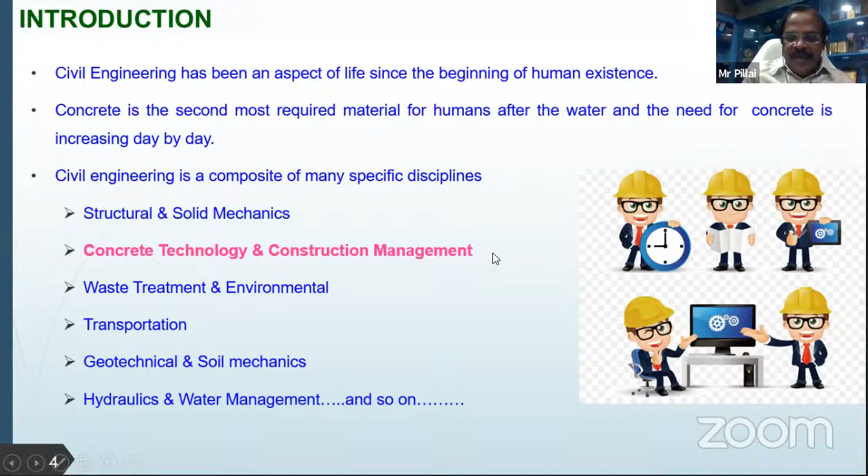Lot of changes are taking place almost in all fields of engineering. Especially the rate of change is very fast when we consider branches like computer science and engineering, information technology, etc. So the developments which have taken place last year may become obsolete this year. Engineers in that field regularly have to update their knowledge with respect to recent developments. Civil engineering is no exception. Change is the only thing that never changes, people say. So in civil engineering also, lot of changes are taking place, with respect to materials, with respect to construction technique, and with respect to other aspects also, like construction management and so on.

If you recollect, in 1960s we started with ordinary Portland cement, mostly people used to call it OPC. Then in 90s, we started calling the cement with respect to their grades: 33 grade, 43 grade, and 53 grade OPC. In 95, blended cement with special cement, we started getting that one. And many admixtures are there, both chemical admixtures and pozzolanic admixtures, to impart one or more desirable quality. Depending upon the requirement, we can add the admixtures.

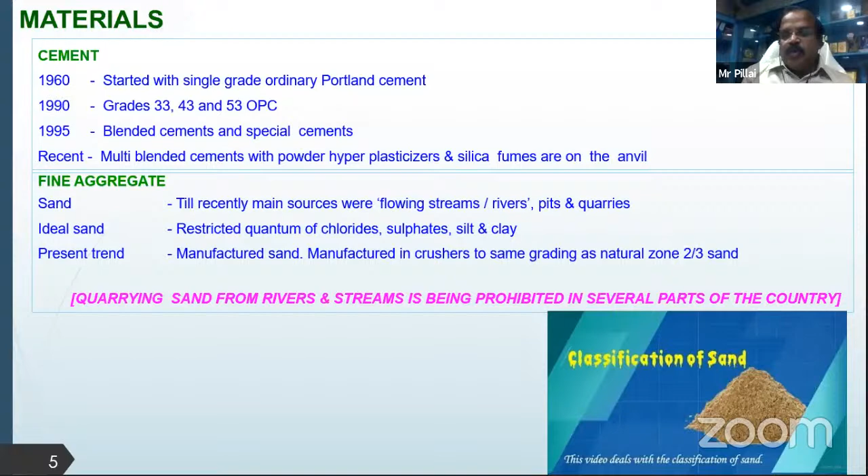With respect to fine aggregate, sand is the most common one we use, and flowing streams and rivers, pits, or quarries are the main sources for sand. Many state governments have banned the use of river sand for construction purposes. So now we are going for M sand, manufactured sand or artificial sand. The ideal sand will have restricted quantum of chloride, sulfate, silt, clay, etc. We cannot use the sea sand available near the seashore because of the contents of chemicals, etc. So the present trend is manufactured sand, manufactured in crushers to the same grading as natural zone 2 or 3, depending upon the requirement.

When we consider coarse aggregates, normally till recently people believed that the preferred maximum size of aggregate for concrete works is 20 mm. There is a general belief that strength is higher with the concept of higher size aggregates. In reality, it is not true. The change in trend is demand for liquid concrete, demand for high performance concrete, trend towards smaller aggregates to achieve the above. Basic studies and fracture mechanics studies have indicated that smaller size aggregates are preferable. So uniform grading of aggregates should be there in order to get the best concrete.

Then, of course, the recycling of aggregates - earlier the concept was that you have to obtain aggregates from natural sources, but now environmentally friendly procedures include recycling of debris, oil, and sewage waste, for conservation of natural resources. We can conserve natural sources by opting for the recycling of aggregates.

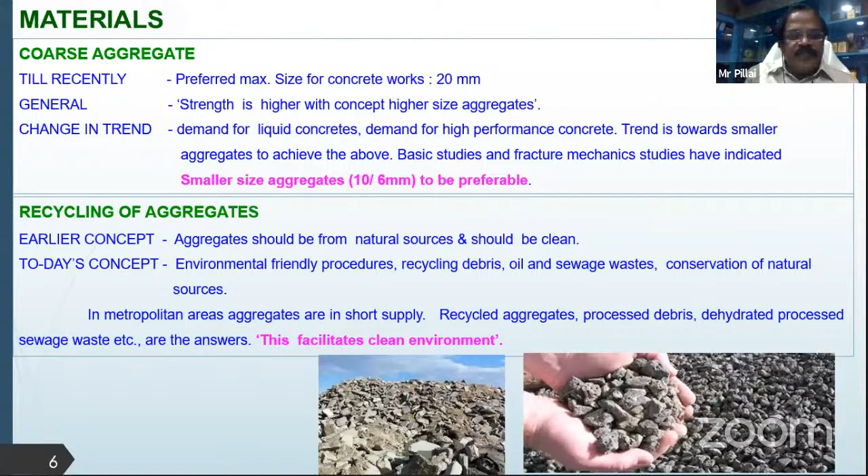Coming to water, till 1975 the best source for water was a natural source, either river or other water sources. But what is the ideal mixing water? Normally people say that potable water should be used for mixing of concrete and curing, etc. But in reality, nowadays, most potable waters are proved to be unfit for mixing. The condition is that the water we have chosen should satisfy the relevant standard codal provisions. So today's best mixing water is processed water satisfying the relevant BIS standards.

Coming to reinforced bars, again in 1967 we used to use MS plain bars of grade FE 250. With further development, twisted deformed bars of grade FE 415 came into existence, and with recent developments, in addition to the above, FE 500 grade steel also we started using. Corrosion is the main problem in reinforced concrete. In order to contain corrosion, we started using stainless steel bars also, of course with limited application. Then the recent development is FRP reinforcing bars, and development of cladded reinforcing bars - fiber reinforced polymer reinforcement bars, which we'll discuss in more detail later on.

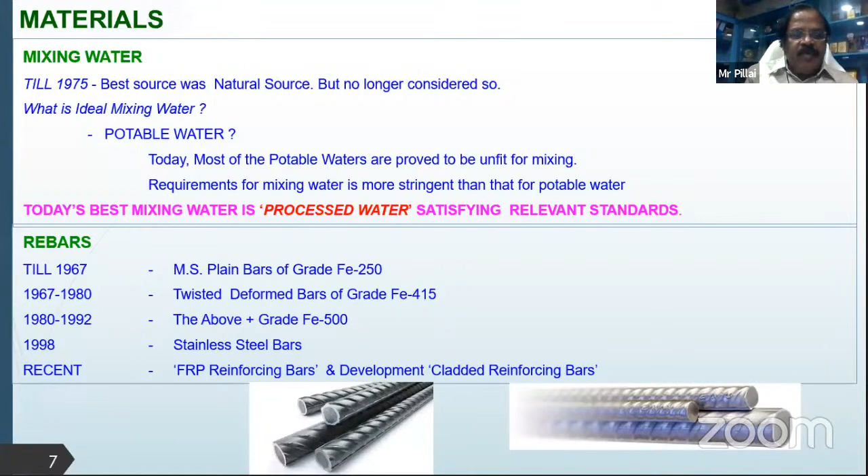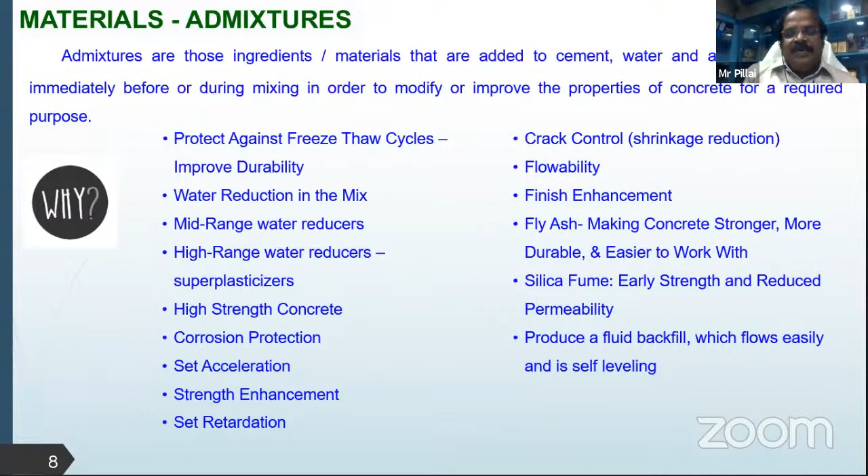Then a lot of admixtures are there to impart one or more of the desirable qualities, and the purpose all of you know very well. Let me not repeat those things.

With respect to admixtures, earlier, till 1980, only air entraining agents from natural vegetation used to be used in concreting. Then we started using different types of admixtures, especially plasticizers and super plasticizers, which are widely used, and recent developments include carboxylate ether-based hyperplasticizers, and many more are available.

Coming to the ingredients, earlier normally concrete means cement, fine aggregate, coarse aggregate, and water. In the 1960s, we used to have only 4 ingredients. In 1980, with the addition of plasticizer, the number of constituent materials became 5. Later, with inclusion of silica fume, it became 6. Again, with fly ash or GGBS, it became 7, and so on. Then we started using blended cement and multi-blended cement, and finally nowadays multi-blended cement with rock fractions, processed water, and we can add latex solution to impart ductility.

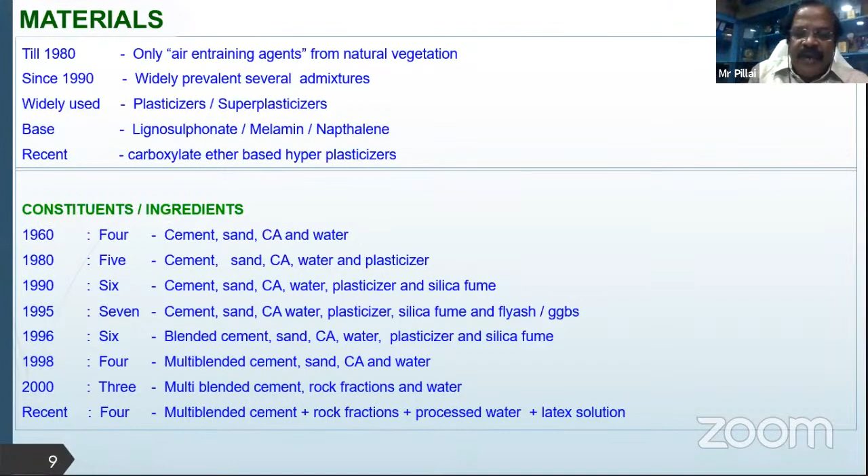So in recent days, the number of ingredients can be either 3 or 4, depending upon whether we are using latex solution or not, since latex solution will improve ductility properties. Cement, or concrete, is a brittle material. So in places, especially in earthquake-prone zones, ductility is a very important property. In order to introduce ductility, you can use latex solution, and a lot of research work is going on in the use of latex solution to improve the ductility of concrete.

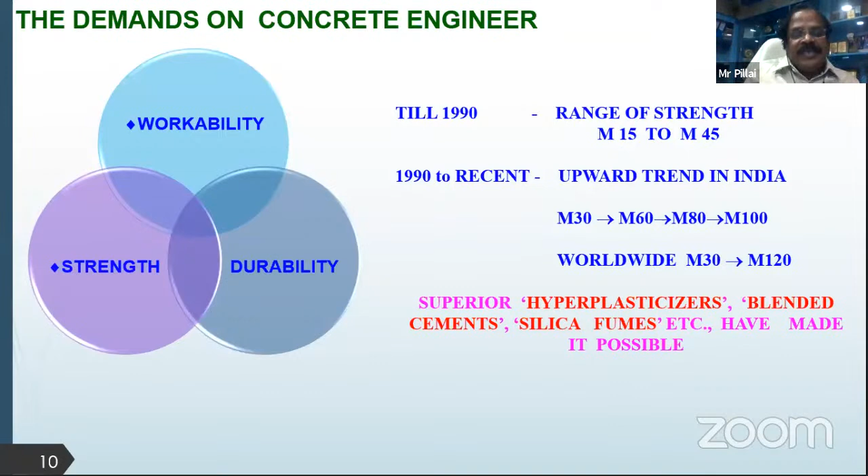Regarding the grade of concrete, earlier we used M15 to M45. Now we are using higher strength concrete, so M30, M60, M80, or even up to M100. Throughout the world, people are using up to M120 also. Still, a lot of research work is going on in order to produce higher grades of concrete up to M200, and with the availability of all types of plasticizers and admixtures, the time is not quite far off that we will definitely be able to achieve higher strength or higher grade concrete.

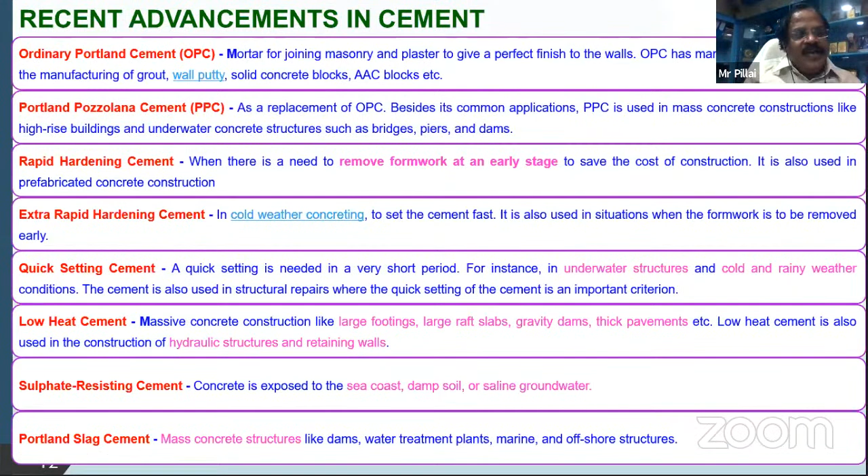So, recent advancements in cement - I'm not going to spend much time on this, since all of you are familiar with these things: OPC, PPC, rapid hardening cement, extra rapid hardening cement, quick setting cement, low heat cement, sulfate resisting cement, Portland slag cement, high alumina cement, and different types of cements. Depending upon the necessity, we can make use of all these things.

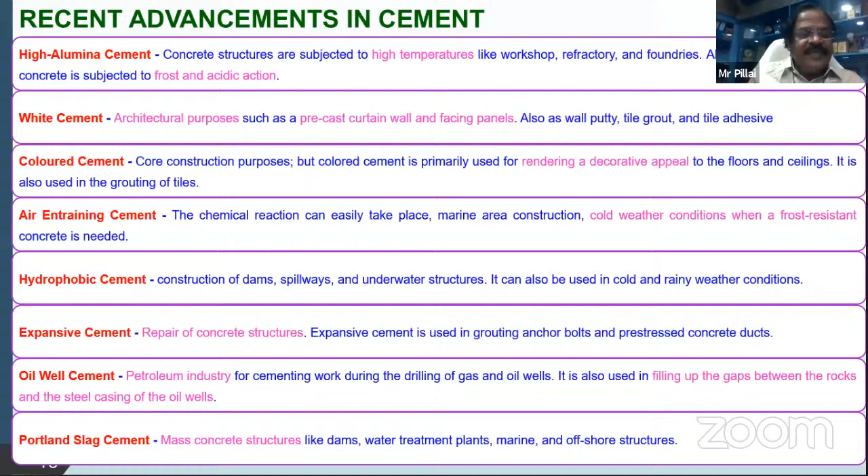In fact, our normal procedure nowadays for preparing concrete is: proportioning or mix design, after that proportioning the materials, mixing, transportation, placing, compaction, and curing. These are the various steps involved in the manufacture of concrete.

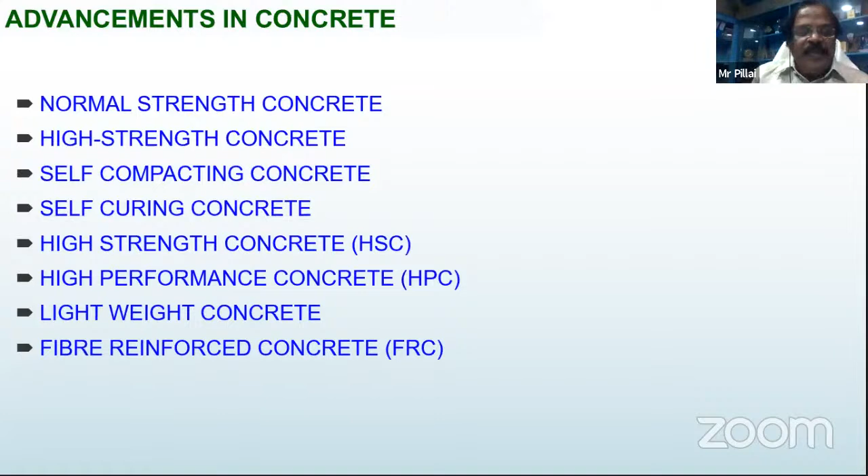Maybe after 1 or 2 generations, the future generation will be studying a different procedure for preparation of concrete, especially with the availability of many admixtures. We will be opting for self-compacting concrete, in which case the need for vibration or compaction will be absent. Similarly, many chemicals are available, so we can get rid of the regular procedure for curing of concrete. Self-curing compounds are available, using which no external curing is needed. So these 2 steps, compaction and curing, will be absent in the methods of preparation of concrete when the future generation studies the method. Then of course comes fiber reinforced concrete, which is familiar to all of you.

Normally, cement or concrete is very strong in compression but weak in tension. In order to introduce tensile load carrying capacity, we introduce reinforcement. But in the case of shell structures, providing reinforcement may be difficult. In such cases, we opt for fibers.

So, fiber reinforced concrete we have, and the updated version of fiber reinforced concrete is slurry infiltrated fiber concrete, known in short as SIFCON. Here there is random placement of steel fibers in the mold to form a fiber bed. Then cement slurry or rich flowing cement mortar is poured onto the fiber bed and vibrated to ensure that it reaches every nook and corner of the mold. Curing is almost identical to other concretes. The only difference is that the fiber volume in fiber reinforced concrete is normally 1 to 2%, whereas in SIFCON it is 6 to 15%, and sometimes it may go up to 20% also.

Another modified form of SIFCON is SIMCON, slurry infiltrated mat concrete. In SIFCON, we place the fibers in a random manner, whereas in SIMCON, we provide the mat or fibers in the form of a mat in a layered fashion.

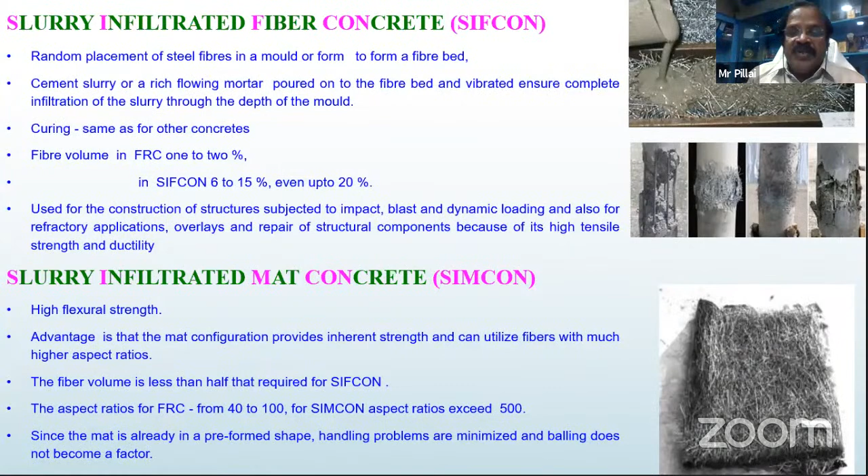Then there is compact reinforced composite, CRC, a very strong and brittle cementitious matrix, toughened with a high concentration of fine steel fibers. When we use more fibers, the resulting material is called compact, and here it will be pressed, not conventionally vibrated. The mechanical behavior will be more or less like that of structural steel, but steel construction costs much more. So when we opt for CRC, the cost can be reduced while the strength remains almost equivalent to that of a steel structure.

Concrete is normally a brittle material, but we can make it bendable. A lot of research work is going on in various countries to make concrete ductile or bendable by using appropriate admixtures.

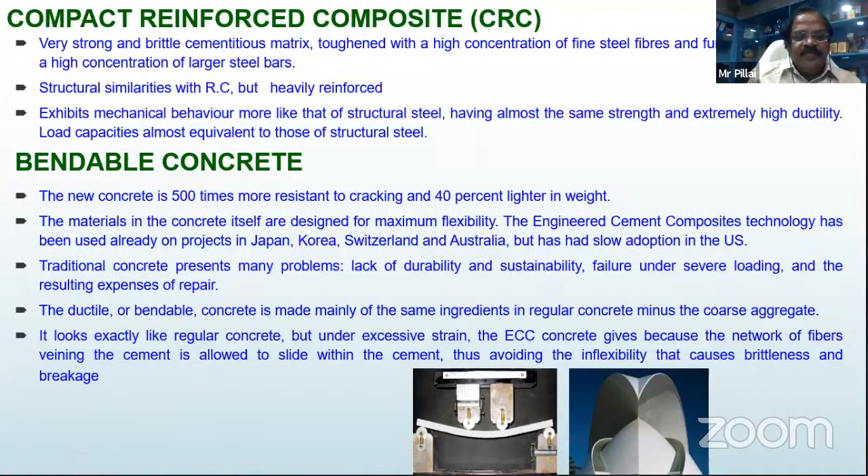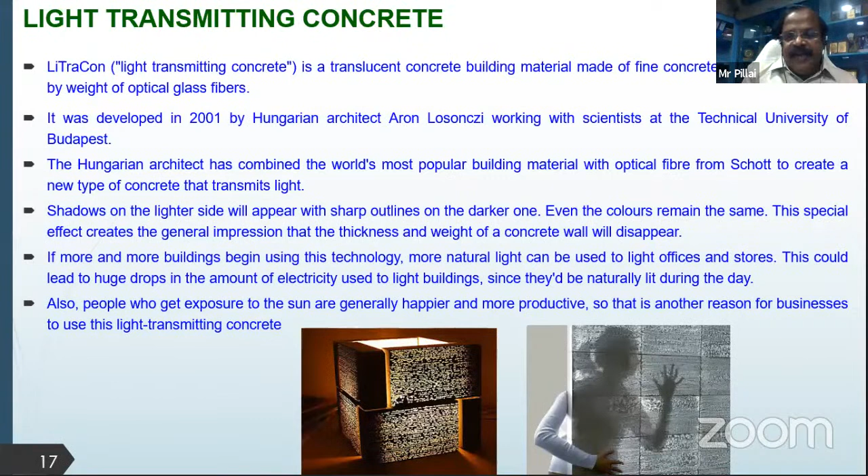Normally, in concrete structures, light cannot be transmitted. But research by Hungarian architect Aron has proved that we can introduce this light transmitting property also for concrete, especially in places where privacy is not important but lighting is important. We can opt for light transmitting concrete.

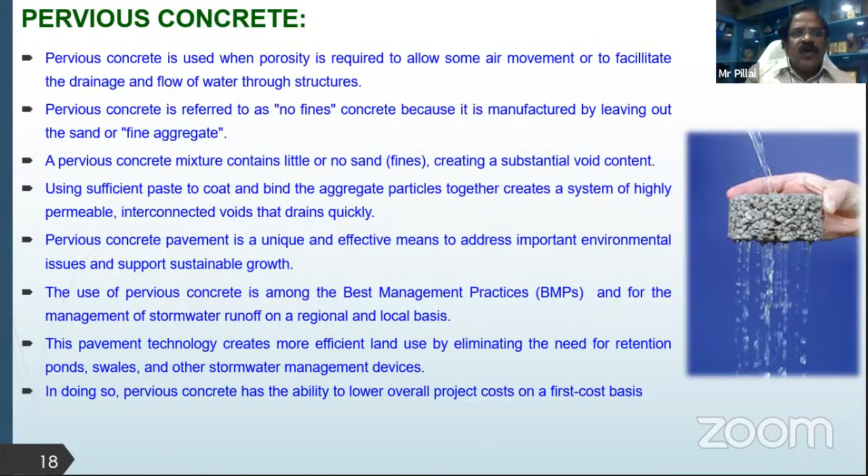Pervious concrete: normally, to avoid or prevent corrosion, we have to make concrete as dense as possible, minimizing its porosity. But in certain places, especially pavements, concrete should be porous so that rainwater collected can seep through to maintain the groundwater table at a higher level. In such cases, pervious concrete is very useful.

A lot of research is going on regarding the suitability of materials available on the moon for use as construction material. Tomorrow, people may start traveling regularly to the moon, and if we want to stay there for a short period, we have to make use of the materials available there for construction purposes. When we make use of such materials, or a modeled version, for construction, the resulting concrete is known as lunar concrete.

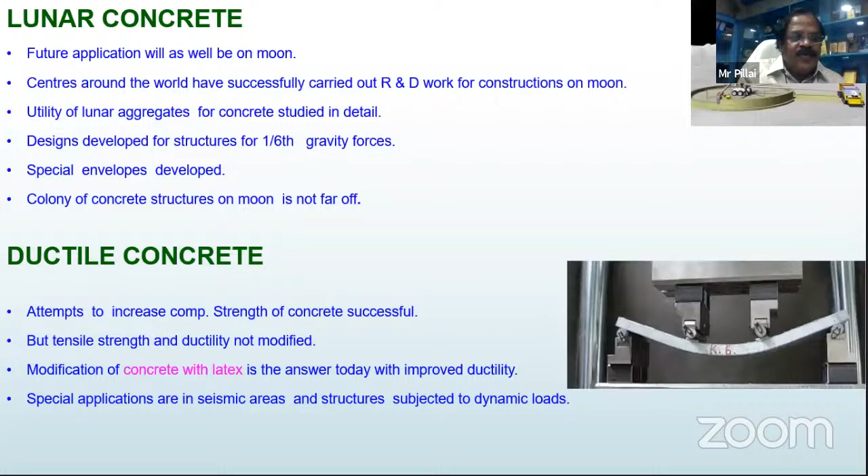Ductile concrete is more or less like bendable concrete, as we already discussed. When we introduce the ductility property, it becomes ductile concrete.

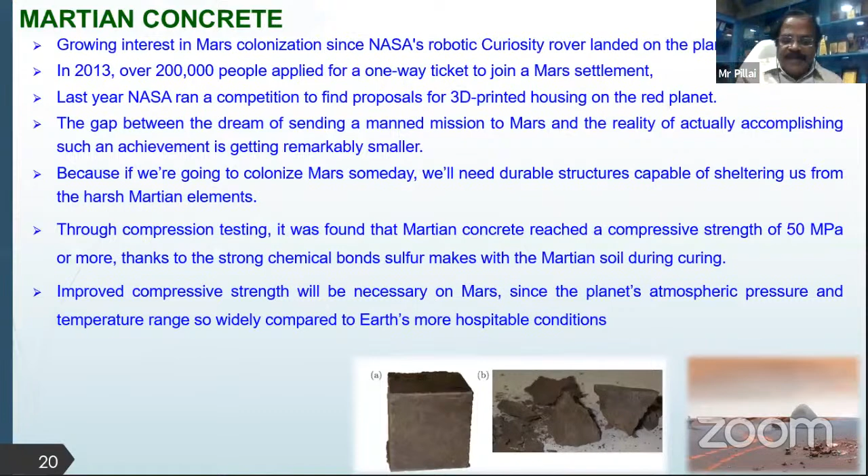Similar to lunar concrete, there is Martian concrete. There is growing interest in Mars colonization since NASA's robotic Curiosity rover landed on the planet. Many people may be interested in traveling to Mars in future, so the suitability of materials available on Mars for construction purposes gives us what is known as Martian concrete.

Smart concrete is often termed conductive concrete. When carbon fibers are introduced while preparing the concrete, the electrical resistance changes, and we can monitor the stress level, strain level, etc. This type of concrete is known as smart concrete.

It has applications in different areas, especially highways, where by sitting in front of our system, we'll be able to measure the weight of the vehicle, speed of the vehicle, and so on.

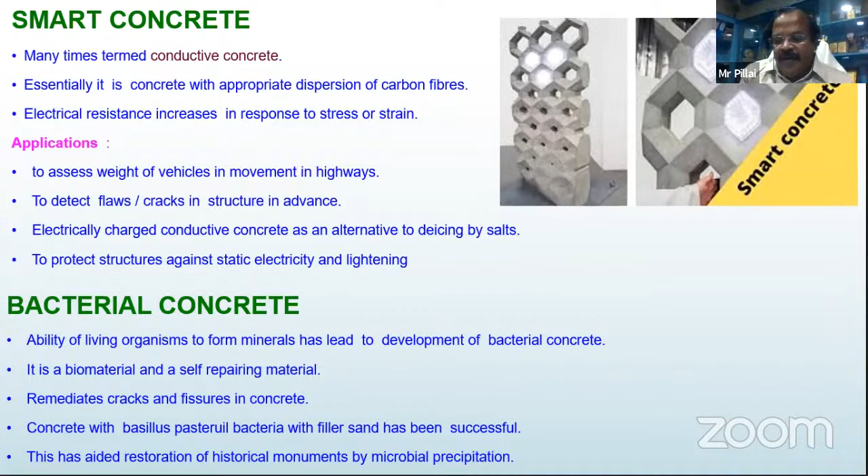Another popular concrete is bacterial concrete. The ability of living organisms to form minerals has led to the development of bacterial concrete. Bacteria will be introduced, especially for repair and rehabilitation work, using this type of concrete.

FRP bars: as mentioned earlier, corrosion is a major problem in concrete. Other methods like using CRS, corrosion resistant steel, and different types of coatings on the concrete surface can minimize the corrosion problem.

Another option is fiber reinforced polymer or plastic reinforcing bars, available in different colors, with weight almost 25% lesser than steel, easier fabrication and installation, electrically and thermally non-conductive, and invulnerable to chemical corrosion. Initially, the cost of FRP bars may be slightly more than conventional tor steel or MS bars.

But when used on a large scale, and considering the life cycle cost—initial cost plus maintenance cost—this may definitely be cheaper than using the other option.

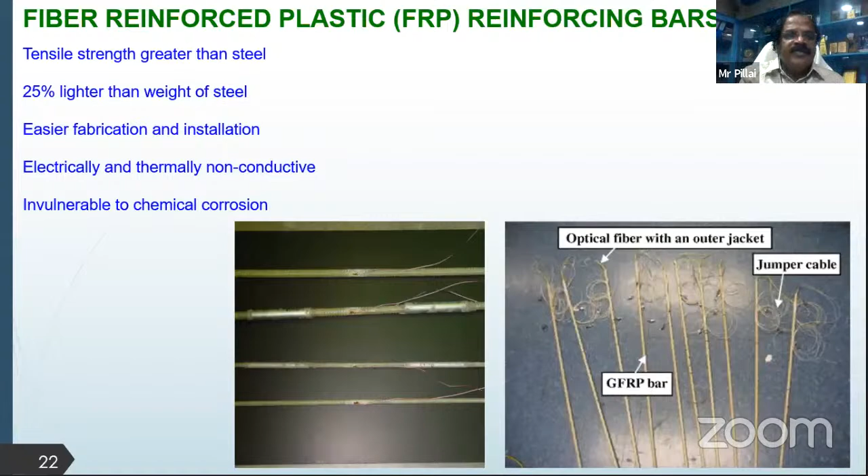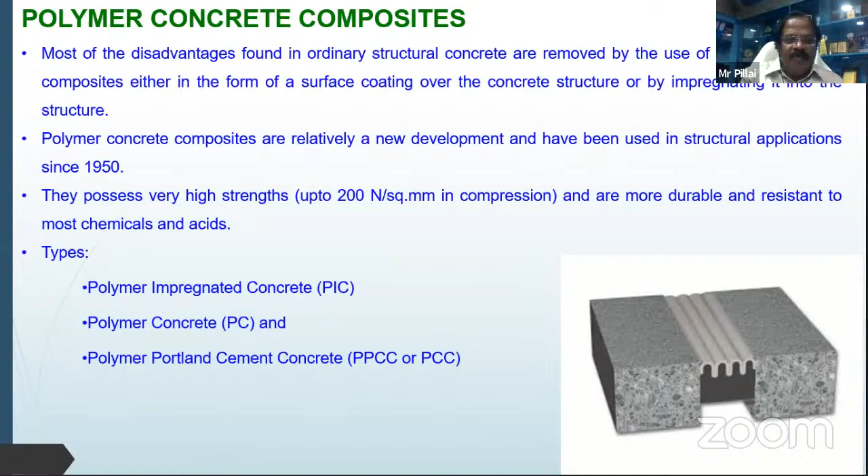Then there are polymer concrete composites. Different types of polymers exist: polymer impregnated concrete, polymer concrete, and polymer Portland cement concrete, and so on.

Waterproof concrete. The use of air entrained concrete reduces the permeability, so you can get a waterproof concrete using water reducing agents and so on.

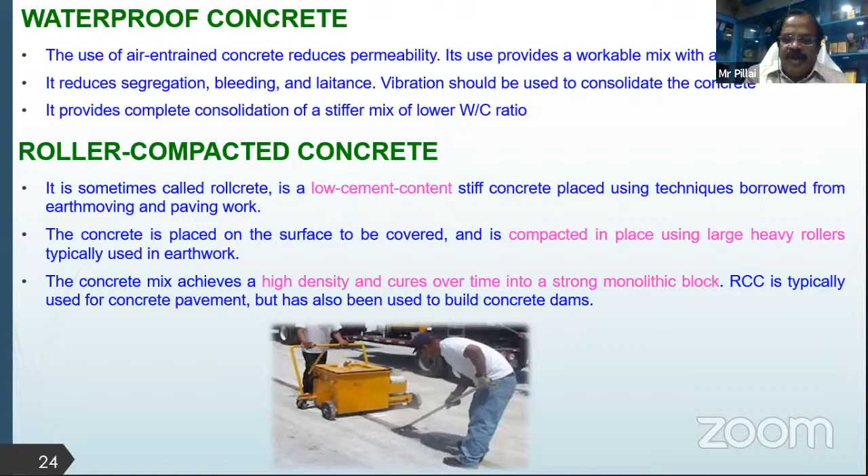Roller compacted concrete, sometimes called rollcrete, is a low cement content stiff concrete placed using techniques borrowed from earth moving or paving work. It is not compacted like our conventional method, but compacted using heavy rollers. The resulting concrete mix achieves high density and cures over time into a strong monolithic block. Especially for concrete pavement where durability should be more, we can make use of roller compacted concrete.

When we make use of recycled glass as aggregate, the resulting concrete is known as glass concrete, especially from an aesthetic point of view, that type of concrete can be used.

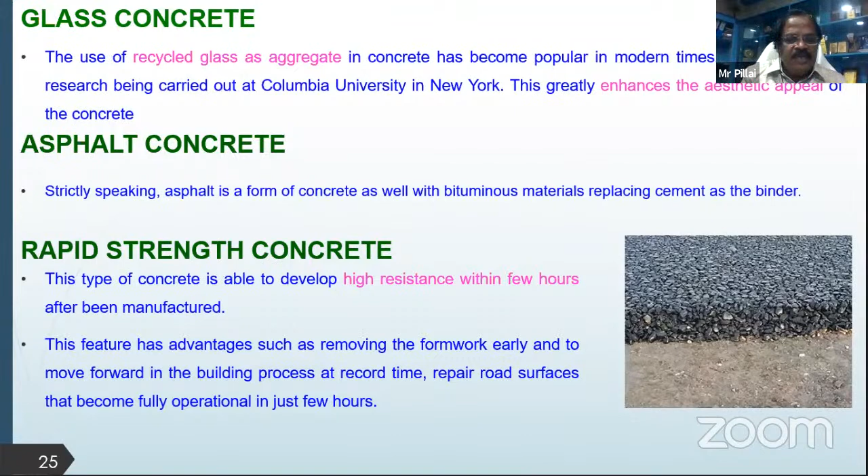Asphalt concrete, here the cement will be replaced by a form of bituminous materials as the binder. Rapid strength concrete is where the strength achievement can be obtained within the shortest period, and we know very well the advantages of rapid strength concrete.

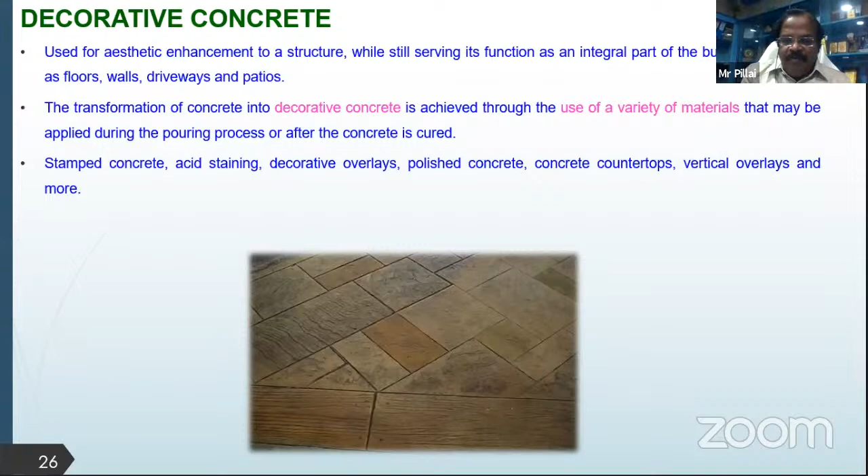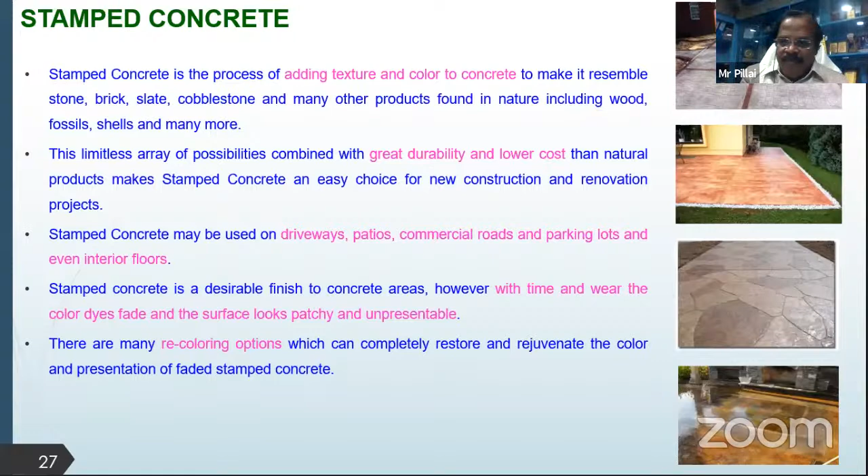Decorative concrete. Normally, conventional concrete has standard color, appearance, etc. In order to improve the appearance, we can opt for what are known as decorative concretes, used mainly to enhance the aesthetic appearance, and a variety of materials can be made use of. One form of decorative concrete is stamped concrete. Even though the pictures look like tiles, the floors or pavements are actually prepared out of stamped concrete.

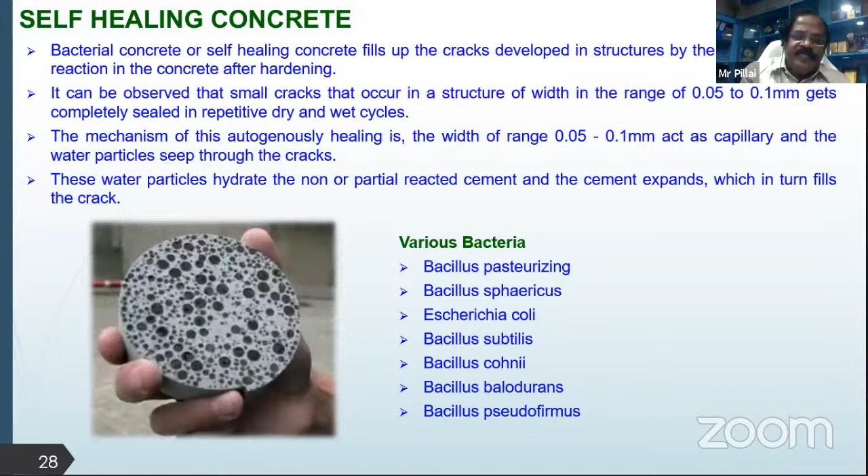Self-healing concrete is another name for bacterial concrete. We already discussed various different types of bacteria. Mainly for carrying out repair work, we can make use of bacterial concrete. Throughout the world, a lot of research work is going on, and people are making use of bacterial concrete for repair and rehabilitation works.

Apart from the developments in concrete, let us discuss the developments or innovations which have taken place with respect to other materials also, like timber, etc.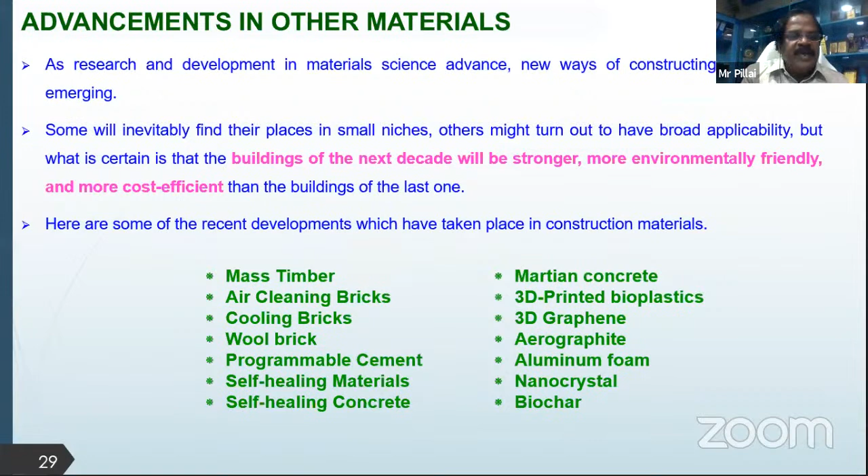Mass timber. Normally when we think of multi-story buildings, concrete comes to mind, but timber can also be used for construction of multi-story or tall buildings. The self weight will be less, and it has its own advantages and disadvantages. In mass timber, solid wood is panelized and laminated for increased strength and other useful properties, which can help tall wood buildings appear in cities again. Wood is originally a high performance material, 100% natural and renewable, and unlike concrete structures, you can always dismantle or reuse the wood removed from a building if necessary.

Again, while preparing concrete, that affects the environment and conservation of energy, especially when we opt for green technologies or green buildings. Naturally, instead of concrete, we can opt for timber, provided timber is available in plenty.

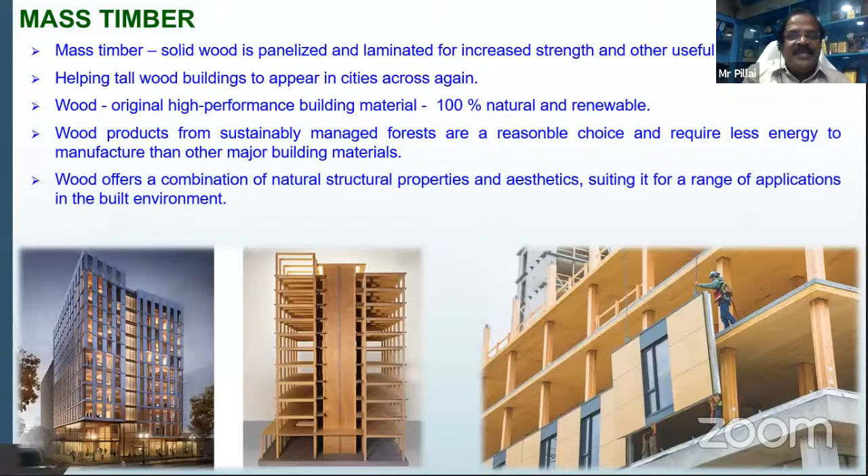Air cleaning bricks, also known as breathing bricks. The air outside the structure is directed into rectangular inlet ports with the help of the faceted surface of the brick. The air that comes into the system is spun by a cyclone filter, winnowing out particles. You can see the arrangement here: a double wall with window operable vents. Air passes through this, and when the air reaches the inside portion of the building, automatically you get a cooling effect. Mainly, this type of brick is optimal for 1 or 2-story buildings or structures where air quality is very poor, especially where pollution is more. This type of brick can be used for construction purposes and has its own advantages.

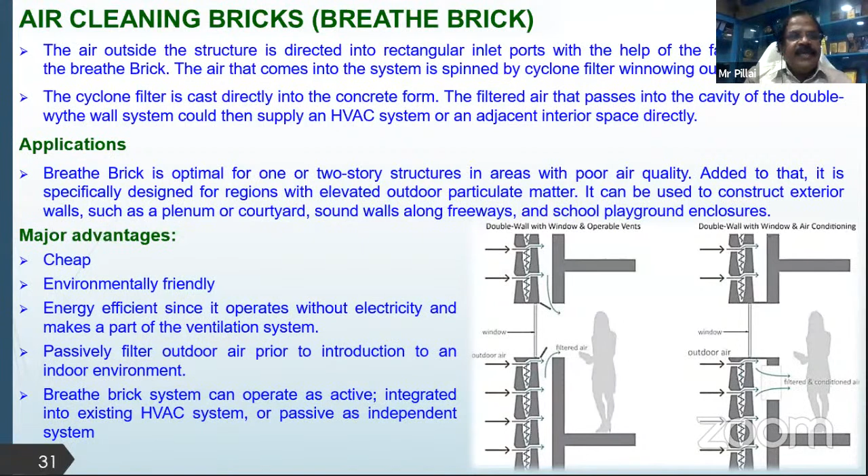Again, cooling bricks, or passive cooling ceramics. Here the bricks have a lot of pores, more or less like air conditioning. In the construction stage itself, we can make use of this type of brick so that we will have a cooling effect inside the house without the consumption of electricity.

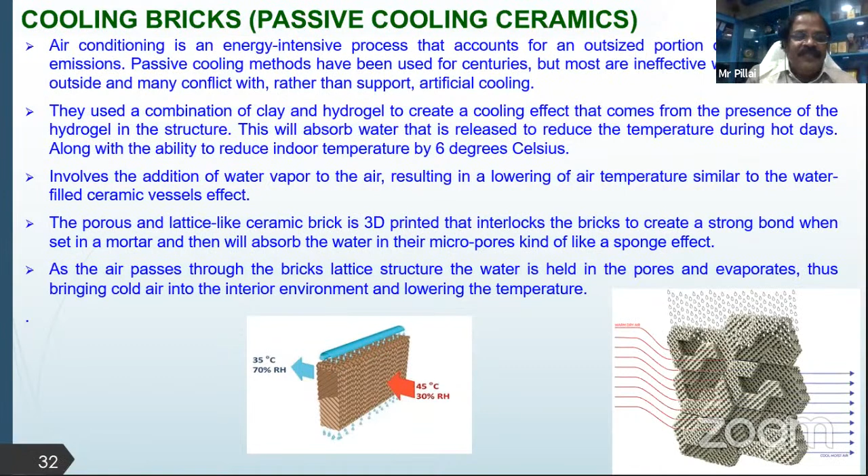That's a major advantage. Wool bricks - researchers in Spain and Scotland have been experimenting with modern forms of unfired clay bricks dubbed with wool. Here again, it's a zero carbon product that can be sourced using local materials.

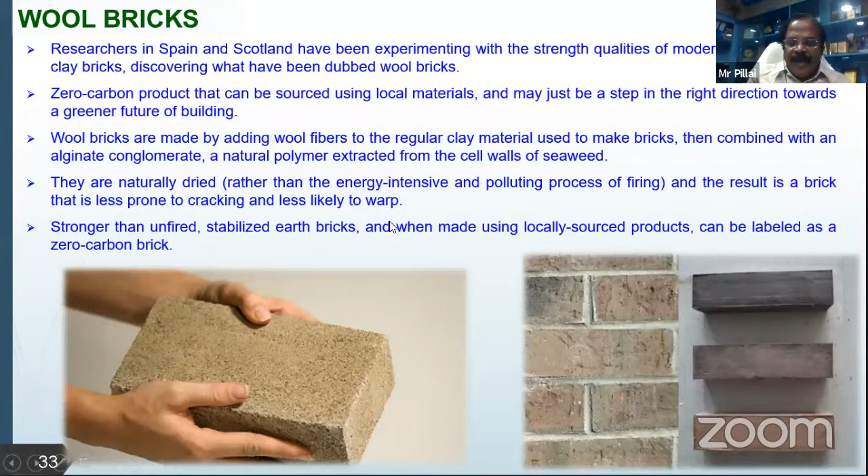This is very strong as compared to the unfired stabilized earth blocks or bricks, and it can be labeled as a zero carbon brick, an environmentally friendly brick.

Programmable cement: scientists at Rice University, Texas, have decoded the kinetic properties of cement and developed a way to program the microscopic semi-crystalline particles within it. This process turns the particles from disordered clumps into regimented cubes, spheres, and other forms, making the concrete less porous and more durable. This technique may lead to stronger structures that require less concrete.

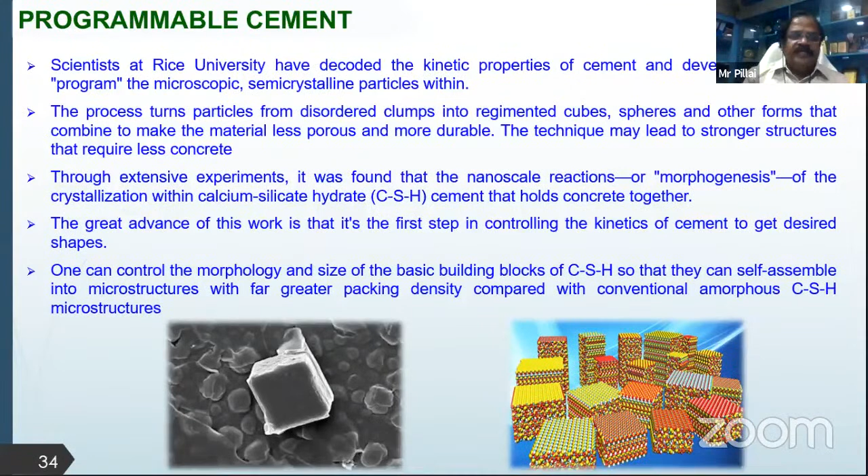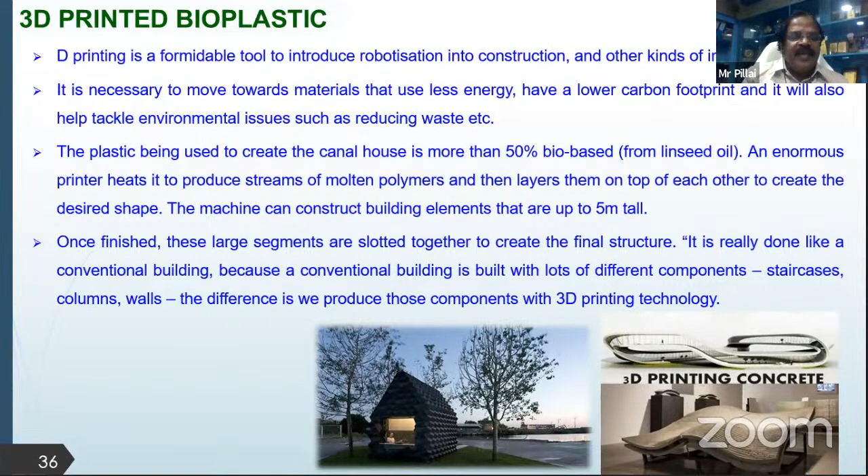Self-healing material we already discussed. 3D printing bioplastic: 3D printing is a formidable tool to introduce robotization into construction and other kinds of innovations, so components can be prepared using this 3D printing technology.

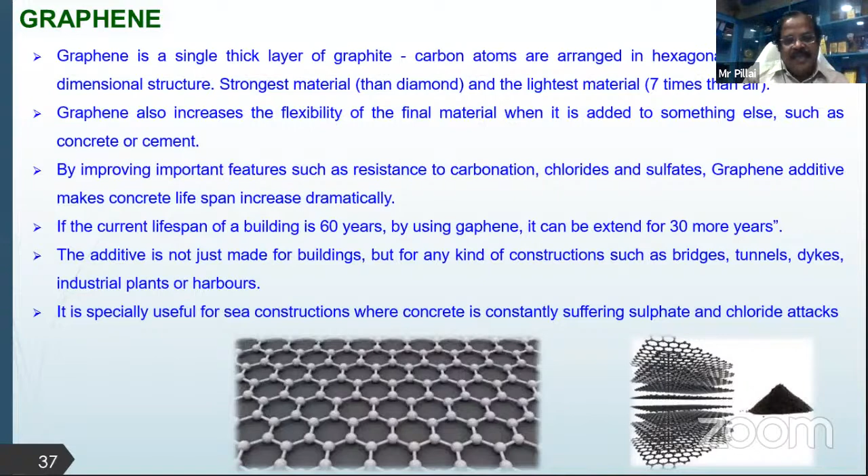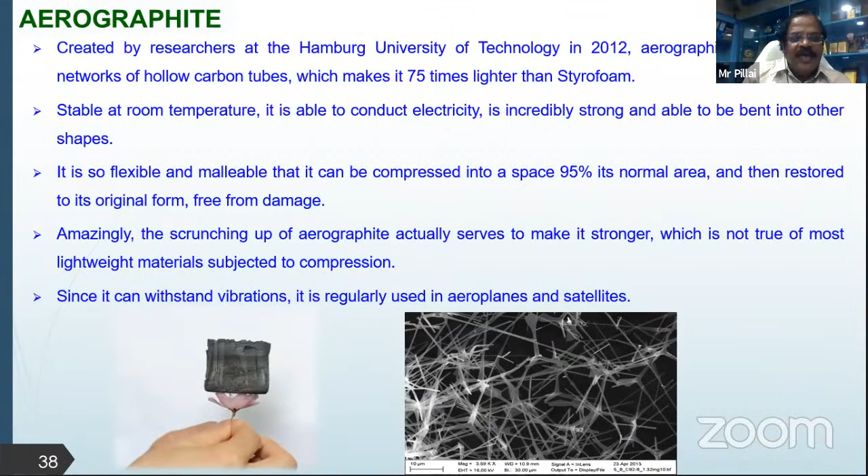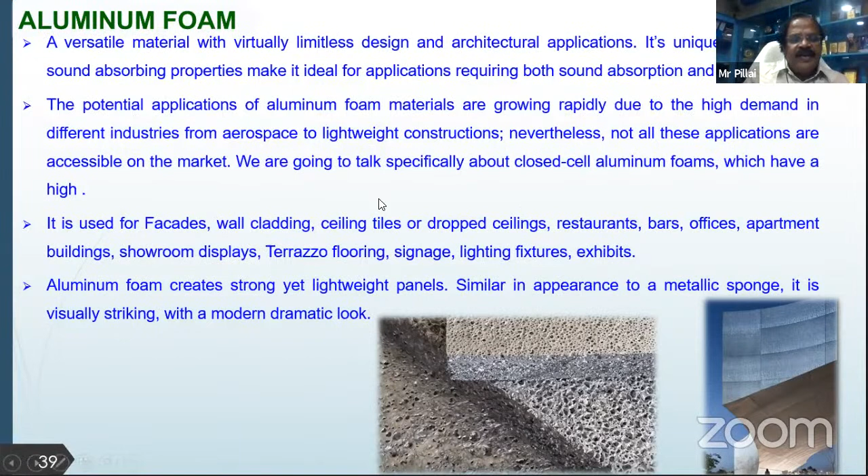Graphene is another material gradually finding its place in the construction industry, especially where nanomaterials are to be used. Similarly, aerographite is another material coming into existence, along with aluminum foam, especially used in facades, wall cladding, ceiling tiles, etc.

Nanomaterials or nanotechnology is finding its place in almost all fields of engineering. In civil engineering too, we can make use of nanotechnology or nanomaterials for construction purposes.

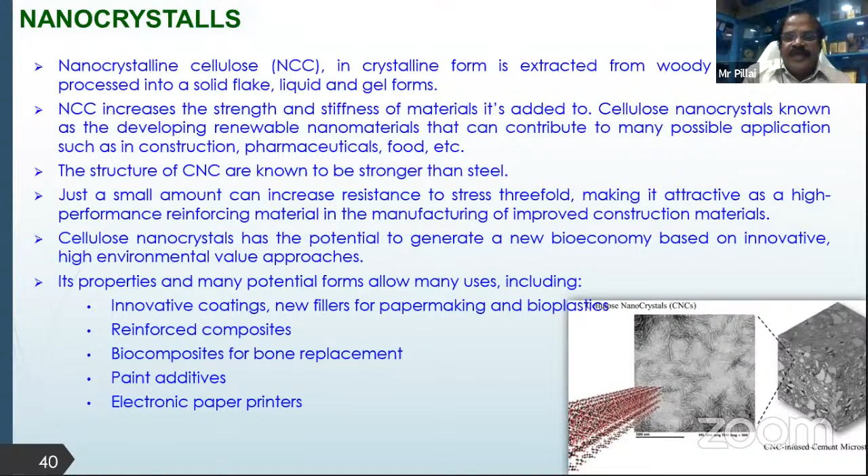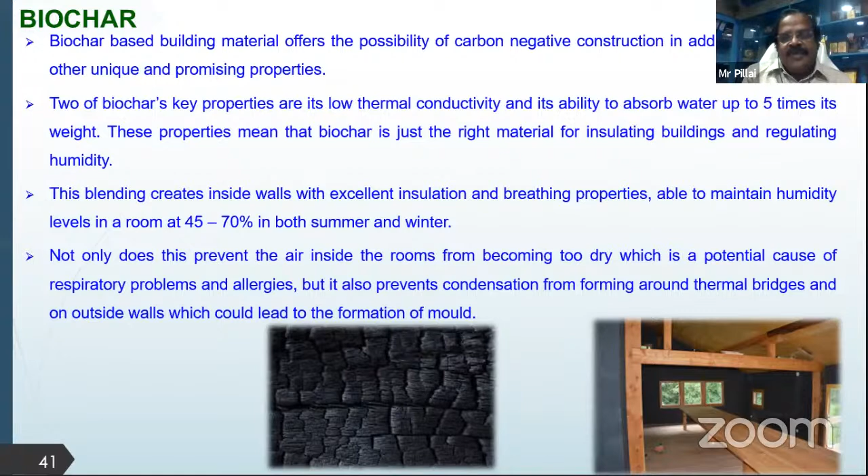Biochar is a carbon negative construction material that can be used where required. Low thermal conductivity is one important property of biochar.

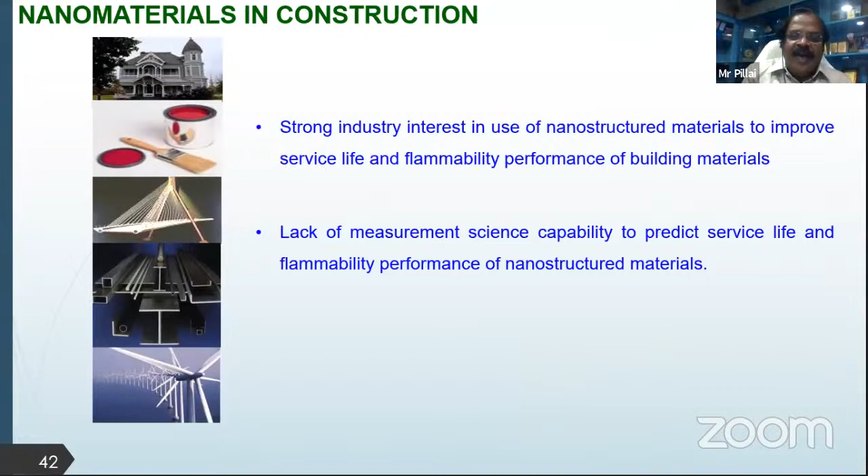Nanomaterials in construction can be used in different forms, such as nano powder form or coating form, especially in concrete. This makes the concrete denser with better compaction, minimizing porosity and achieving dense concrete, which automatically minimizes or avoids corrosion.

Nano cement and nano concrete—a lot of research work is going on, and slowly this is finding its place in the field.

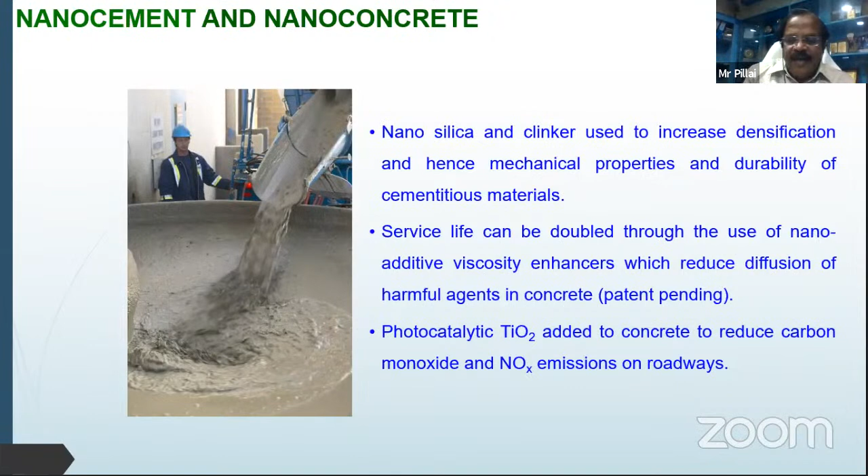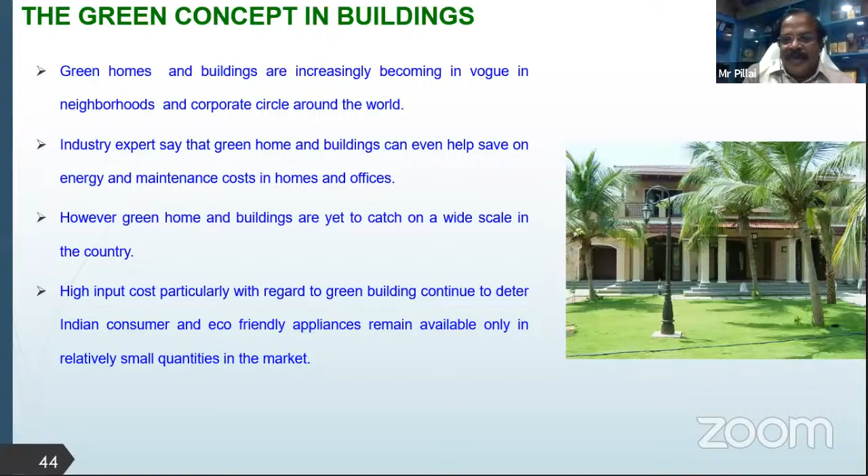The concept of greenhouse effect or green buildings: as far as possible, without external artificial arrangements, we should be able to get a cooling effect and minimize pollution to the environment. Green homes and buildings are increasingly becoming in vogue in neighborhoods and corporate sectors around the world. They save energy and maintenance cost in homes and offices, and also help minimize the pollution we cause to society.

Smart and energy efficient buildings and constructions—smart buildings, automated buildings, or intelligent buildings should behave depending upon the situation, using automated systems, wireless technologies, and embedded systems.

Even health monitoring of structures is possible—not only buildings but structures like bridges too. By sitting in front of a system, we will be able to identify whether a particular part or component of the building is subjected to higher levels of stress, and so on.

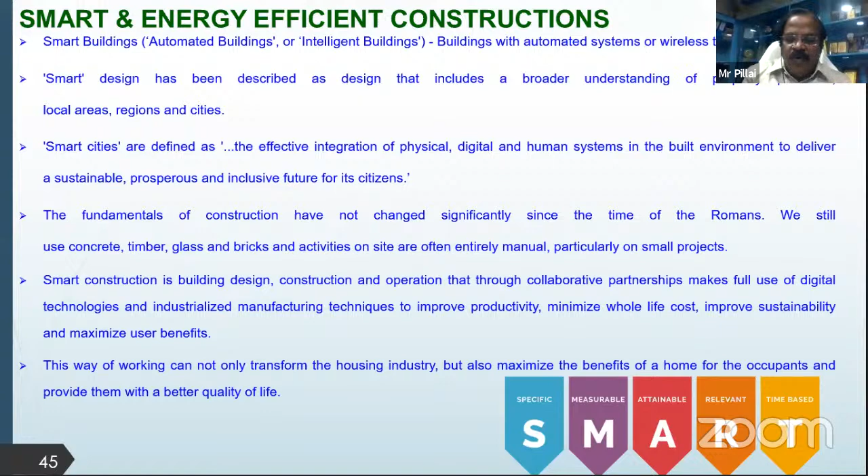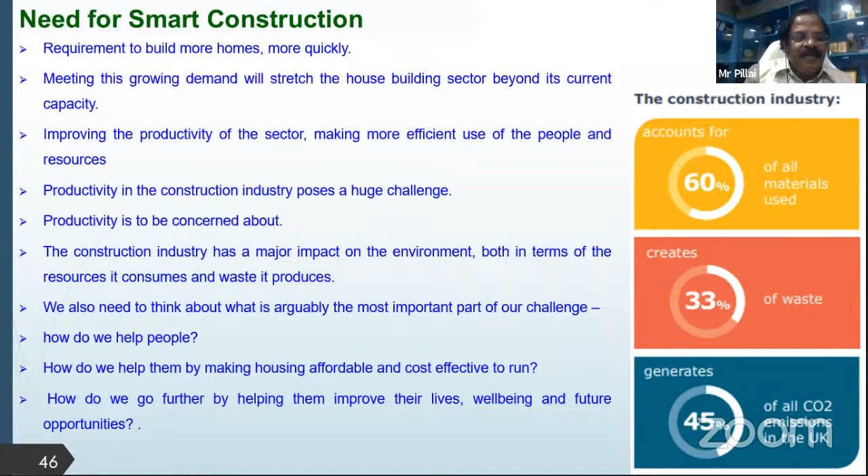The need for smart construction is well known, since developments taking place demand it. So how can we make use of smart construction?

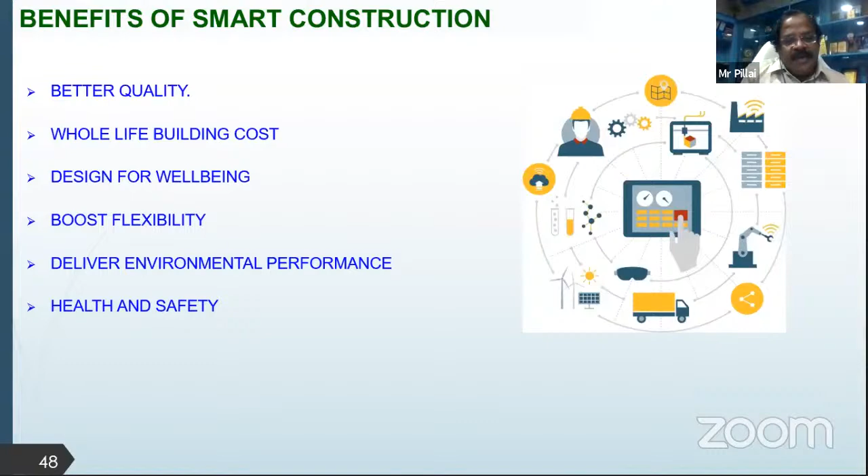Benefits of smart construction include better quality, whole life building cost, designed for well-being, boosted flexibility, environmentally friendly behavior, and health and safety—all these things are there.

Sustainable constructions, especially green building constructions, share these features. Sustainability means preserving natural resources for future generations without compromising the quality of present needs—we should not exploit natural resources. When we opt for sustainable constructions, future generations will also be happy to live on this planet Earth.

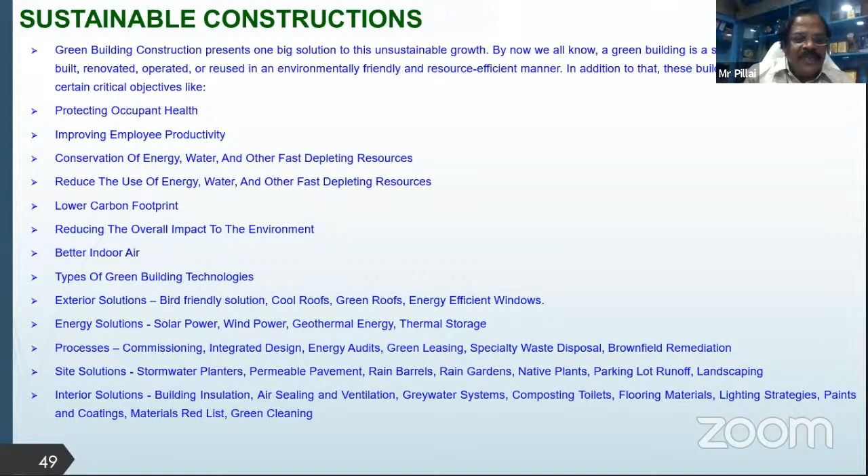Coming to construction techniques and construction management, what developments have taken place? Modern construction techniques are methods developed in the construction industry with proper planning and design, so that each project reduces construction time, cost, and maintenance, improving overall sustainability.

The most famous and highly applied methods of modern construction are the precast flat panel system, 3D volumetric modules, flat slab construction, precast cladding panels, twin wall technology, precast concrete foundation, etc. Flat slab construction has been omitted here since it is available in regular textbooks.

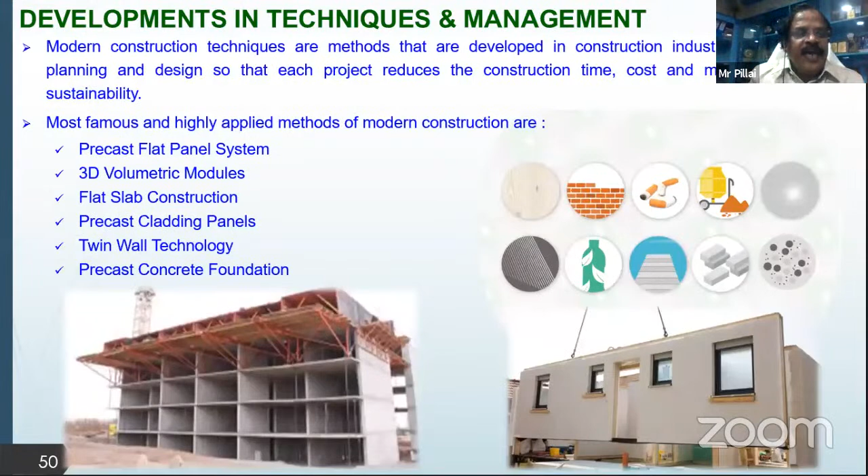In the precast flat panel system, components can be manufactured in the industry and brought to the site for assembly. There are some advantages as well as disadvantages: construction time can be minimized, and quality control is better when panels are fabricated in the industry, so we need not bother about on-site issues.

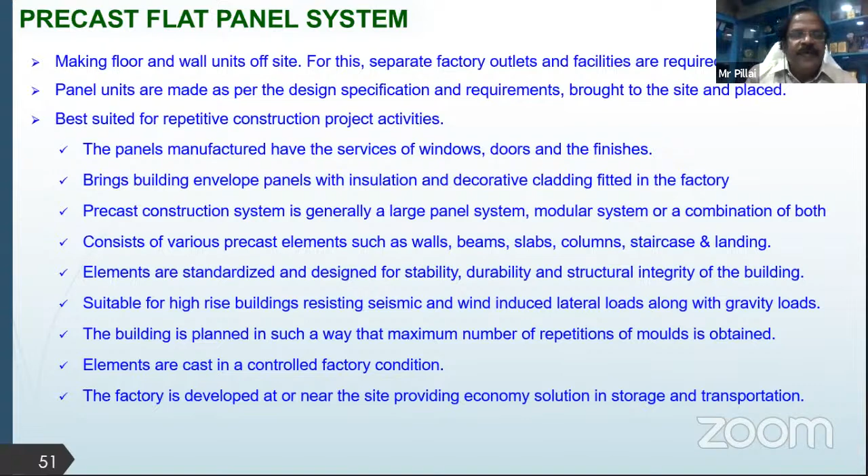The connections should be proper, and the panels are to be standardized. The dimensions are to be standardized if you want to opt for precast flat panel systems.

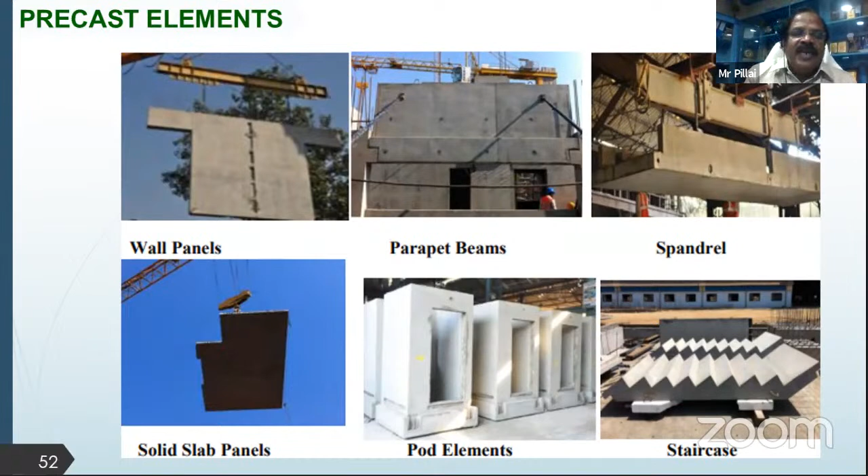Some pictures related to that. The various components like wall panels, parapet beams, spandrels, etc., can be fabricated in the industry and factory, brought to the site and assembled. Later, if you want to dismantle the structure, it will be very easy compared to conventional concrete structures. Instead of panel members, we can fabricate 3D volumetric modules also, which can be fabricated in the industry, brought to the site, and construction carried out.

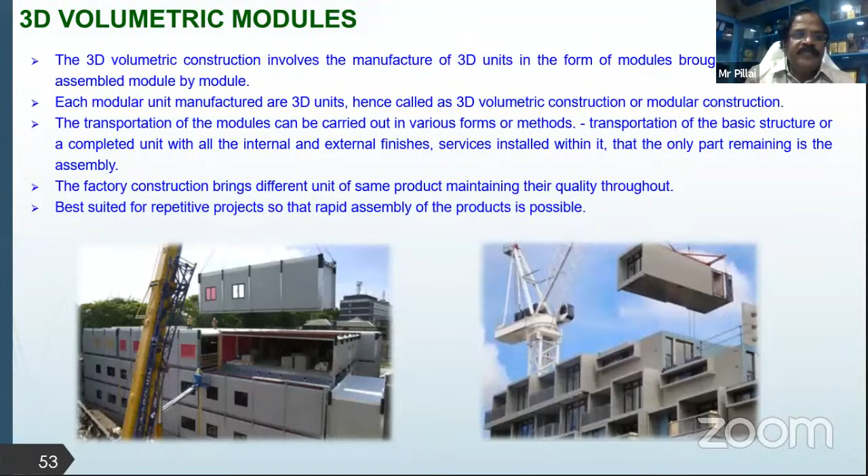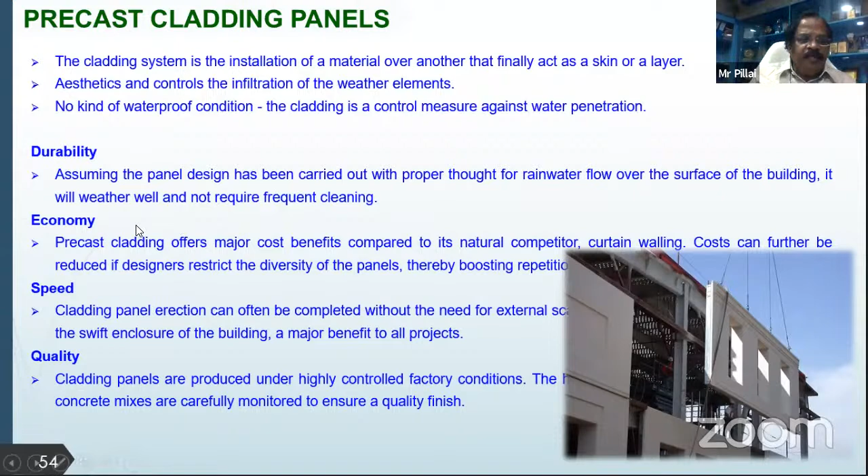So no involvement of human labor, unlike our cast-in-situ concrete structures. There is no waterproofing condition issue, so naturally the durability will be better. When we produce in mass scale, it will lead to economy also, speed in construction, and quality of construction will be better. Appearance will also be better.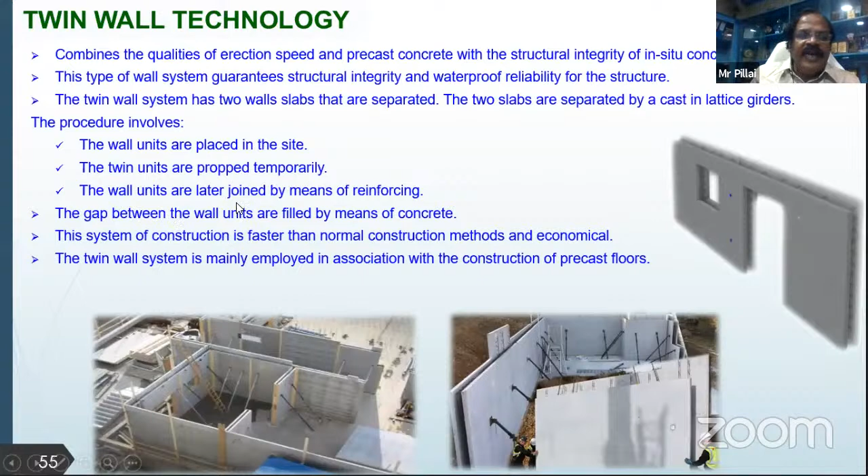So this is twin wall technology. Here the wall units are placed on site and the twin units are propped temporarily. The wall units are later joined by means of reinforcement.

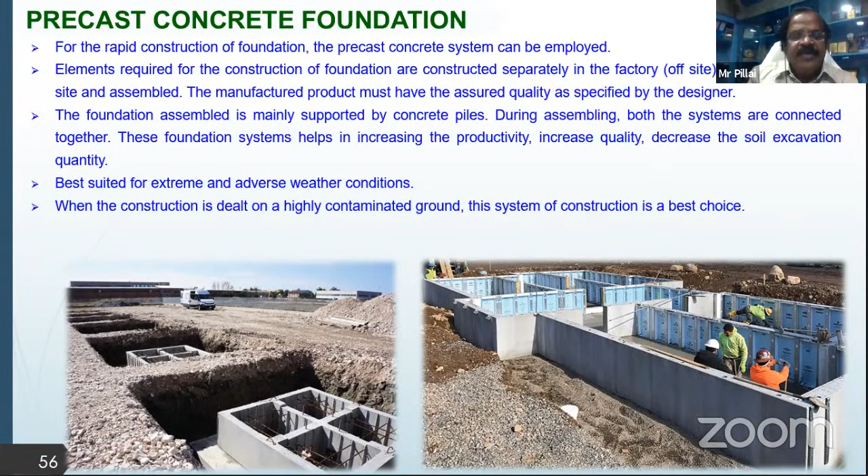Again, the foundation can be prefabricated and brought to the site. Similar to other types of prefabricated construction, here also speed of construction is more, quality control will be better, and so on.

Then coming to developments in software. Earlier, construction of even a 3-story or 5-story building itself would be difficult before the invention of software. Manual methods like moment distribution method or other types were used to analyze frames. But now, with the availability of different types of software, whether for drawing buildings, plan and project planning, or any other domain, software is available. With such software, for any civil engineer, the sky is the limit for going for tall buildings or skyscrapers.

With respect to drafting or drawing, we have AutoCAD and SketchUp. For project planning and project management, Primavera and Microsoft Project are available. For 3D modeling of structure or architecture, Autodesk 3ds Max, Autodesk Maya, AutoCAD Civil 3D are available. For geotechnical work also, we have software available like GeoStudio, Geo5, etc. Plaxis, many people are using this software also. For road designing analysis, MX Road, Bentley Road Network are available. Many of you may be aware of structural analysis and design software like StaadPro, SAP2000, ETABS, Revit Architecture, Midas Gen, SAFE, Abaqus, etc.

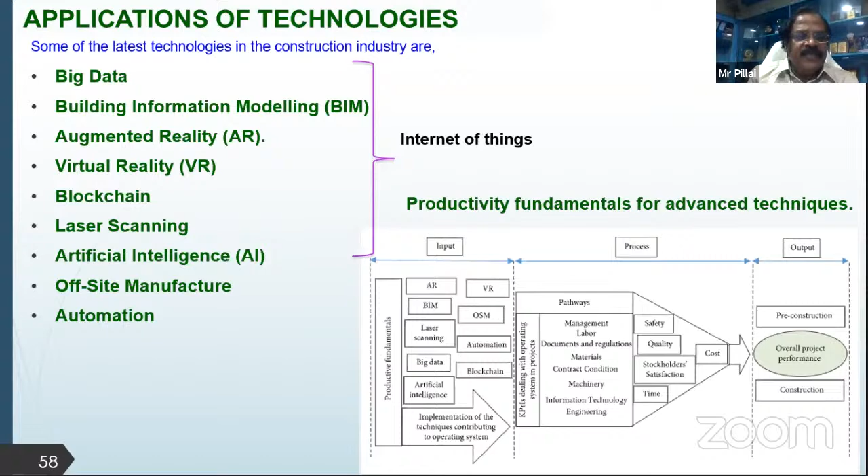So quickly we will browse all these terms and terminologies. The term big data refers to an industrial revolution brought about by the use of vast amounts of data characterized by volume, variety, and velocity for business improvement, cost optimization, and prediction of revenue. Especially in construction of buildings, cost optimization is important, and prediction of revenue is also important. This third function has been found applicable to the construction industry to improve cost effectiveness. Cost reduction is the final outcome of the comprehensive information on cost effectiveness produced by big data directed techniques and tools.

Building information modeling, BIM, offers numerous precise and practical data to the construction industry, from an improved computer-aided drawing model to the involvement of project stakeholders in a multidisciplinary working environment.

BIM presents considerable potential for coordination, collaboration, and integration, along with improvements in information flow and data processing that reach beyond the capacity of traditional construction methods. The leading practices of BIM are planning and scheduling, constructability assessment, 3D model visualization, clash detection, measurement estimation, site management, safety management, and operation management.

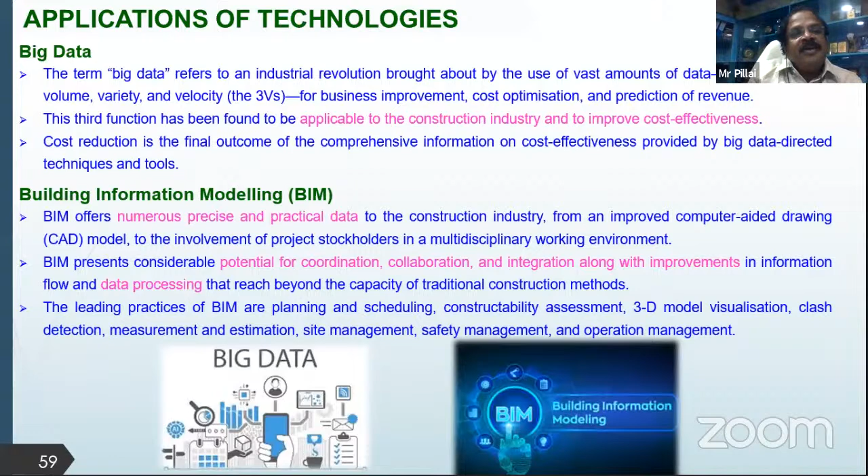Our Vel Tech University has signed MOUs with many foreign universities. Recently, one of our final year students went for his internship to Taiwan, where he underwent training in this BIM model, and with his knowledge in BIM, he could get a job there. Apart from that, he got an offer from an education institute also for an MS program. So he got two offers because of his knowledge about BIM. It's a new avenue for many budding civil engineers.

Then comes augmented reality. The captured images can be manipulated in the same way as they can in reality. Augmented reality originated from virtual reality, which partially creates an environment wherein the operability of an object can be sensed and practiced in real time to improve the human understanding of it.

As the high quality visualization of details is very effective for reducing the complexity of information, it is claimed that augmented reality techniques accord with the big data objectives to generate information for better decision making and better understanding. For example, AR is capable of being paired with BIM to enable designers to apply more maintainable and sustainable principles to their designs.

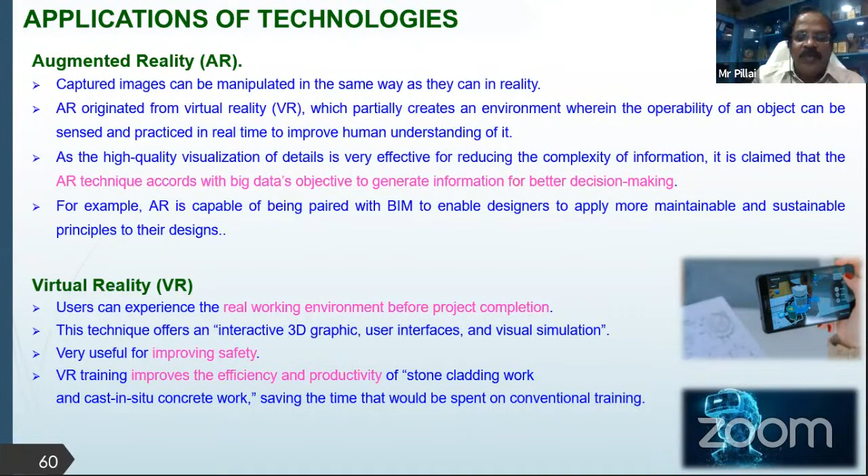Then comes virtual reality, so users can experience a real working environment before project completion. During the planning stage itself, we can do 3D modeling and show the clients how the completed building will look, with a walk-through. You can take them to the hall, to other rooms, etc., as if they are physically moving from room to room. These techniques are also available nowadays.

Then blockchain techniques, through which a database of records, transactions, or digital activities are recorded and distributed among the stakeholders. Once entered, the data can never be changed or removed. The four characteristics are: it is public, not owned by anybody; it is decentralized, not stored in one single place, more or less like cloud computing; constantly synchronized to keep transactions up to date; and secured by cryptography.

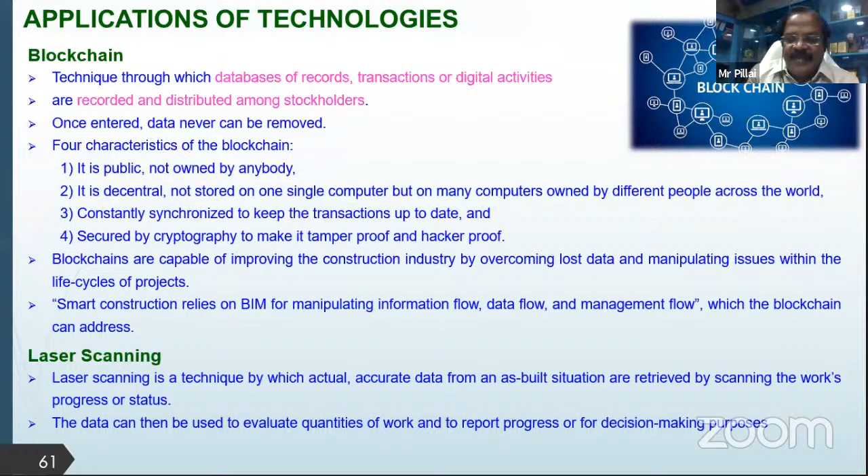Laser scanning is a technique by which the actual accurate data from an as-built situation are retrieved by scanning the work's progress or status. The data can then be used to evaluate the quantities of work and to report progress or for decision-making. Even the principle of laser is already finding use in total stations. We are making use of this technology nowadays, even in survey, for measuring distances, length, breadth, height, etc., more accurately, especially in places where we cannot have access; this type of instrument will be very useful.

Artificial intelligence techniques. AI techniques whereby human perceptions can be transferred into machines, allowing them to perform the way humans are supposed to behave in a complicated situation. Artificial intelligence has been in existence for a long time, but nowadays it is finding its application in the civil engineering field also.

Then, of course, off-site manufacture. OSM is a technique offering a combination of prefabricated components and on-site activities. The components are either erected to shape a constructed object or attached to in-situ built components. In fact, the off-site components are produced in a controlled manufacturing environment and then transported and positioned onto a construction site.

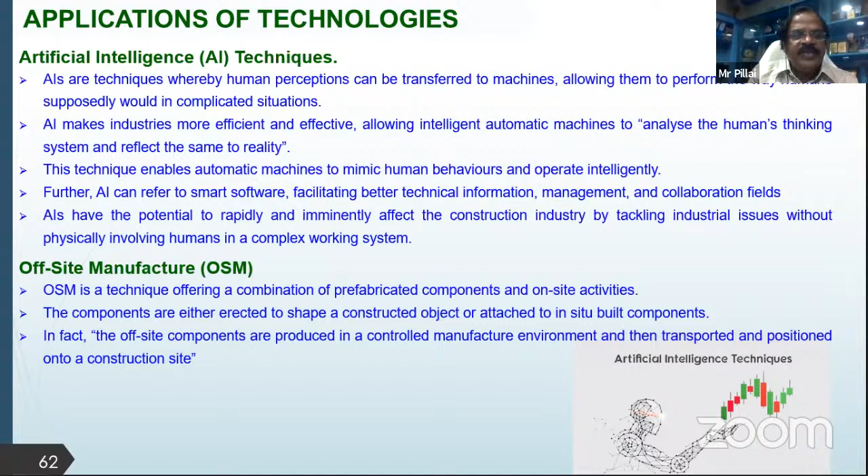Then, of course, automation is taking place everywhere, even in the construction industry, for construction of walls or anything. Automation refers to a technique by which a procedure or cycle of process is carried out with minimal human involvement, whether it is for construction of walls or even plastering. We can automate everything. This technique makes industries more efficient and effective by applying software as well as hardware to complete the task automatically. Though highly beneficial, this equipment, machinery, and process are operated via controlling systems in complex situations.

However, sometimes a controlling system fails as a consequence of human-related errors, and any potential benefit is transformed into a loss or even a disaster. So we have to be very cautious while automating or making the system an automated one.

Automation has been observed to optimize construction site productivity, and is also capable of promoting mass production of prefabricated construction components in factories. In certain areas where the environment is not conducive, such as chemical-prone areas where chemical smokes are present, or wet conditions, human construction cannot be carried out or may be difficult. In such cases, these techniques will be very much useful.

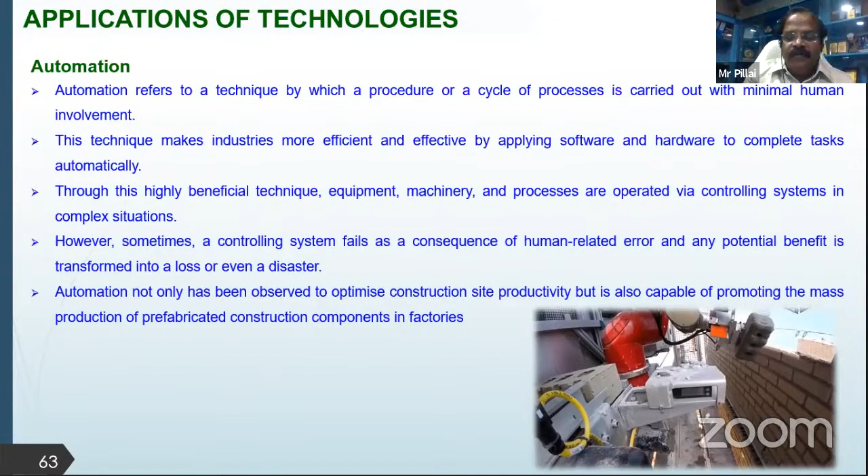One thing all of us should understand: people say that if a doctor commits a mistake, he can kill only one person. Whereas if a civil engineer makes a mistake, either in planning, construction, or maintenance, the cost or damage caused will be much more, and can never be compensated.

There are so many case studies where a small mistake, either in design or construction, has caused havoc, causing - most regularly we see through newspapers or news channels - buildings collapsing during the construction stage itself. The reasons may be plenty. Repair and rehabilitation work itself is a big subject, where the quality of materials, quality of construction, and perfection in design all play a vital role.

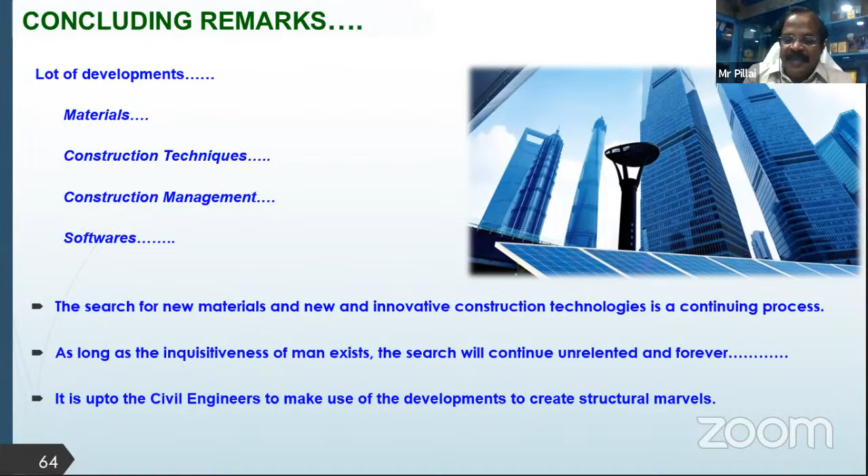So we, the civil engineers, should understand our social responsibility. We are responsible for perfect planning of structures, constructing and maintaining them, considering everything so that we will be able to have safe and durable structures which will make society a safer one. If only we can construct buildings like this, definitely it will make the world a perfect one.